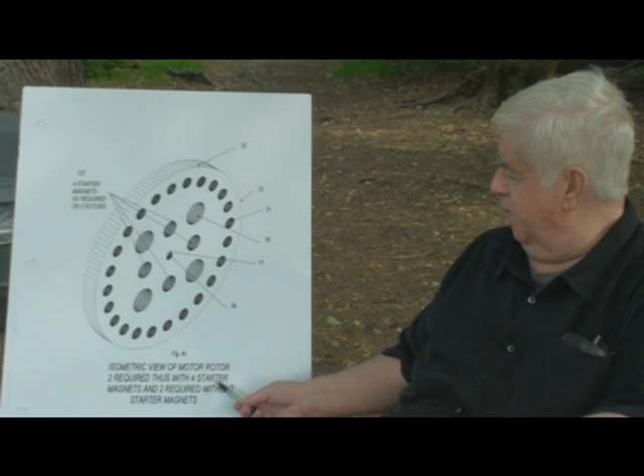What this is, as I say, is an isometric view of a motor rotor. There are 2 required with 4 starter magnets and 2 required without starter magnets. But you also have a plurality of these in any type of device. You can have 2, 4, 8, 10, whatever number and whatever size you want, and it will work.

These will be offset on either side by a stator. The stator will not rotate, it stays in its place. It will contain the electromagnets that, as these permanent magnets approach the electromagnets, will turn off. And then as the permanent magnet goes by it, in order, it will stay off for a second. The magnetic field will collapse, and then the electromagnets in the stator will reverse their polarity.

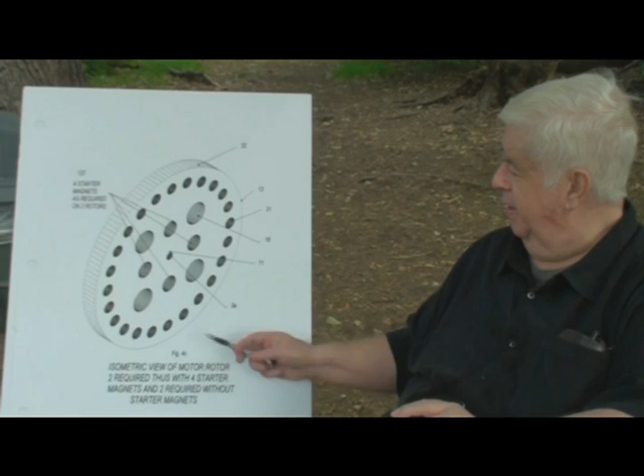Instead of pulling this permanent magnet to it, it will turn off. The magnet will coast by that point, and then when it's off top dead center of the electromagnet, the electromagnet will be switched to the opposite polarity, and it will push that permanent magnet and thus the rotor along. Each one of these will be happening in sets of 4 around it, so it'll keep going in an attractive way to pull it past the stators, and then it will turn off just before it reaches top dead center.

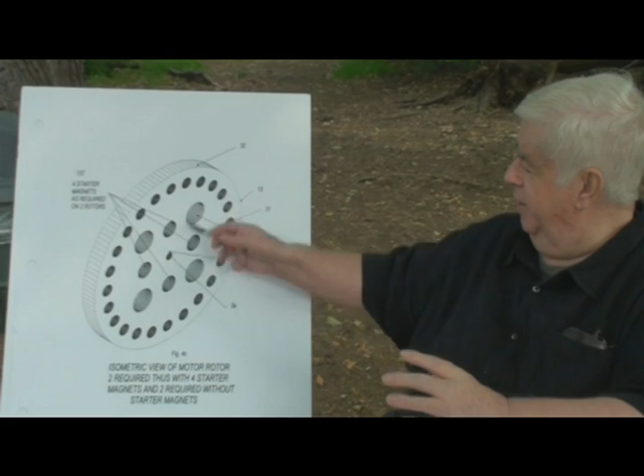Of the magnetic attractive electromagnet. Then the electromagnet will switch off, and as its magnetic field collapses, the permanent magnet in each and every one of these will go past that top dead center point, and just after it gets off the top dead center, it will be pushed by the reversal of the magnetic pole of the electromagnet in its place as it goes by. And so then the electromagnet will push that permanent magnet and the rotor around.

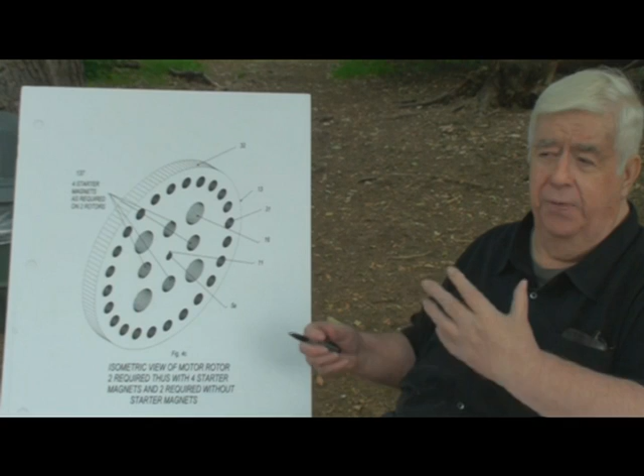And that is the basic principle of this. In other words, to put it very simply, any particular permanent magnet of whatever type of magnetic material - there are lots of supermagnetic materials, and lots of plain iron magnets that this will work nearly as well for - it can be just a matter of adapting the design of a motor generator for any particular use, by sizing it, by having different permanent magnets, whether rare earth material like neodymium iron boron that I first utilized in building such a machine, or other regular permanent magnets such as iron, cobalt, and so forth.

But in other words, the principle is very simple. As a permanent magnet mounted on a rotor comes past a stator with an electromagnet opposing it directly, as it comes near the electromagnet, this will always be north on this side, and the electromagnet will switch from south to north.

So as this particular magnet is coming up towards an electromagnet on the stator, which is right here, as opposed to this point, it will be pulled. The positive pull will be from the permanent magnet's north-seeking face and the electromagnet's south-seeking face. However, just before they touch and would lock, the electromagnet is turned off.

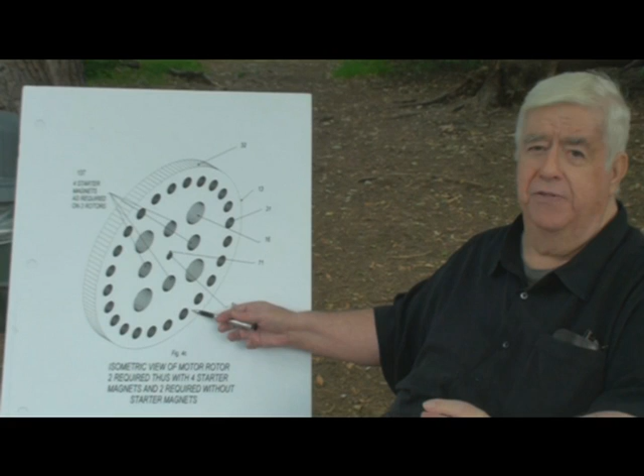And the electromagnet being turned off will still be unaffected by the permanent magnet going past it. It'll coast past it. But just as soon as it gets off top dead center, the electromagnet will be switched so that the face that was the south-seeking pole will now become a north-seeking pole, and it will powerfully repel that north-seeking face on the permanent magnet. And it's that simple.

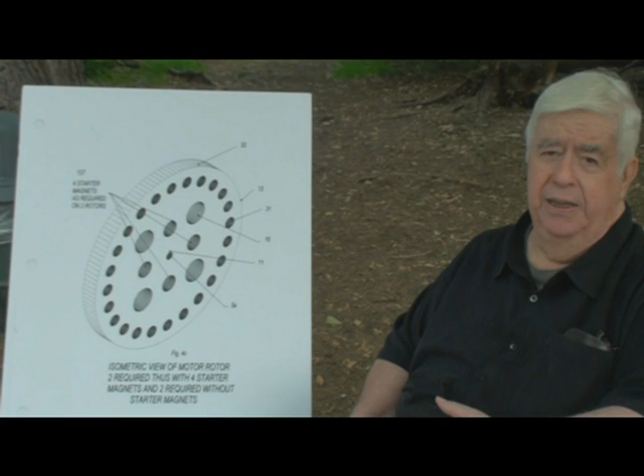These are part of a starter system. But it's very simple. Once you start it, this thing will run until it wears out, or until you turn it off. Start it with a permanent magnet, and it will then run as long as you keep it running, powered by the dark energy that uniformly fills our universe's bubble and picks up energy.

It gives 4 to 6 billion times a second from the scalar particle, as I have named it, which is the smallest particle in the universe. For that, read my Theory of Everything.

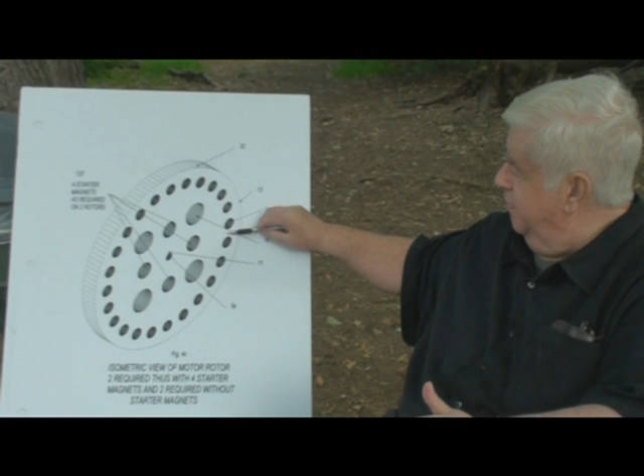But it's that simple. You pull any permanent magnet past an electromagnet, which it's facing. You have this one rotating, this one facing, and as soon as this particular magnet, or any particular magnet, gets halfway distance between the south-facing permanent magnet, electromagnets rather, the north face will come across a case where this electromagnet goes off. It will coast past, then the electromagnet will kick it.

So it'll pull it, it'll go off, it'll coast, kick it. It comes back on with opposite polarity. It's as simple as that.

And it's a principle that I had played with. I knew there was energy trapped there. I knew that magnetism was not properly explained. In fact, I have a book on one of my desks co-authored by a physics Nobel Prize laureate, and its description of permanent magnetism is an energy of a unique kind.

Well, that's descriptive by a nominative value. It gives it a name. Could have just as easily called it by one of my sister's names - permanent magnetism is Beulah. But it doesn't describe it. It doesn't explain it in a meaningful way. And what I have done is explain magnetism in a meaningful way in my Theory of Everything, which is in many places on the internet.

But the point being that I knew, as a small child, that a tiny piece of steel made into a very small paper clip could move around a very powerful permanent magnet. It wasn't the energy of the paper clip that did it - it was the energy generated by the large permanent magnet and the tiny paper clip.

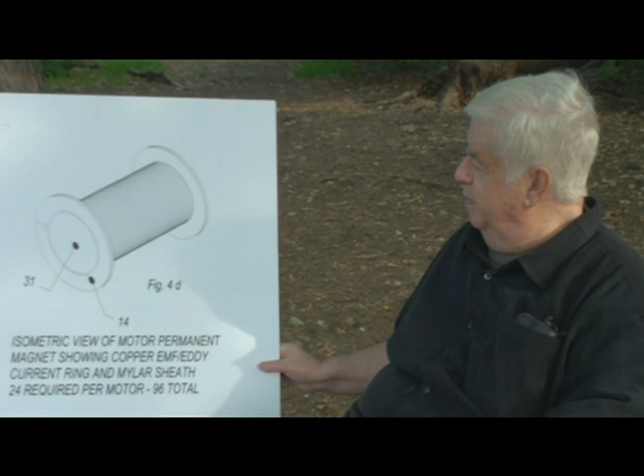And what you basically have is a permanent magnet that has a sheath around it.

First of all, it's a casing of plastic, and then it has a copper ring mounted to that with a gap. What it will do is pick up back EMF forces that detract from the strength of the magnets and the strength of the engine, and it will also pick up the eddy currents that blew up my first motor in 1982 within a split second.

So the motor demonstrated unbelievable output power versus the input power, but it blew itself apart within a split second, an incredibly tiny fraction of a second. We were never able to measure it. We didn't have the money for the equipment to measure at that time.

My partners in the venture wanted to keep all patent rights and monies within the community of 6 of us total. I tried in vain to convince them to bring in others. I even went to the point of arranging a meeting with Paul Allen and Bill Gates, and I spoke to them for a number of hours in early February 1982 about the invention and the problems in developing it for lack of cash, and asked if they were interested.

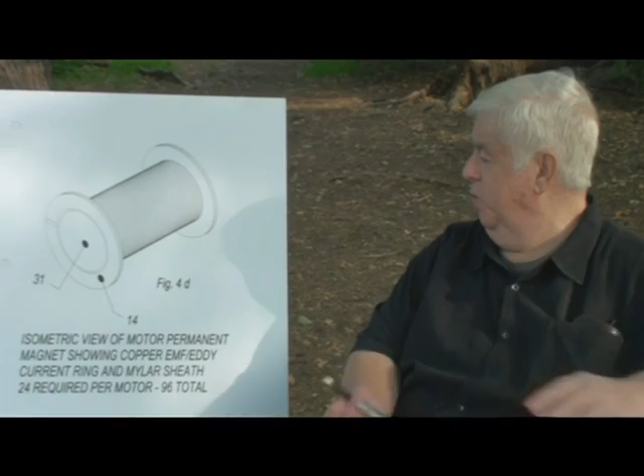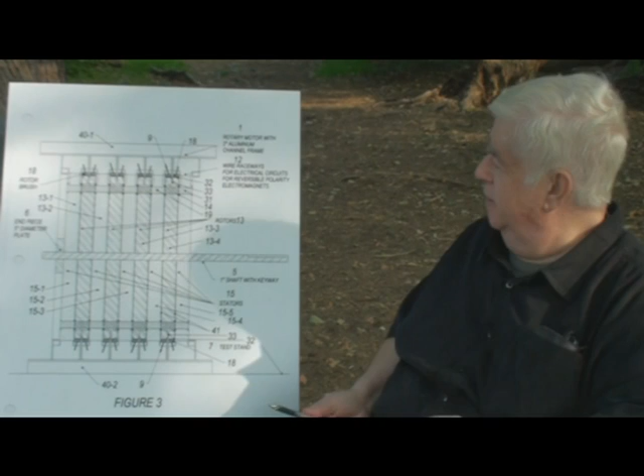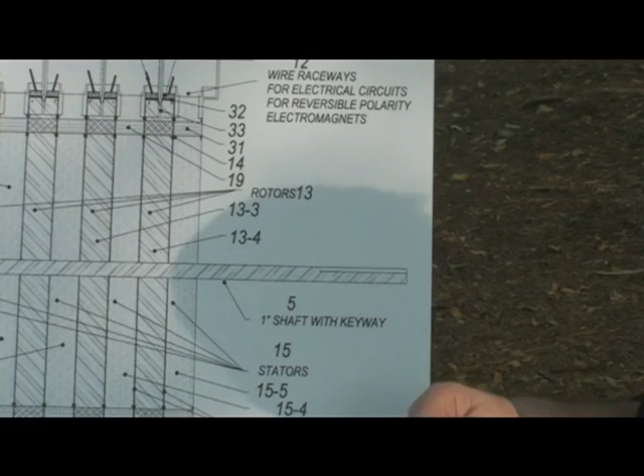I would now like to go to the next element, and that is a cross-section view of my prototype dark matter motor. It is a combination of rotors and stators. These are the rotors - there are 4 rotors, and in this configuration there are 5 stators. The stators contain the electromagnets that switch their polarity from north to south as the permanent magnetic rotors go past them.

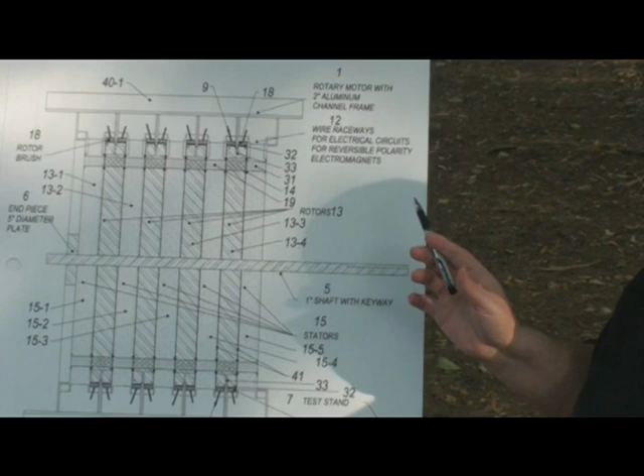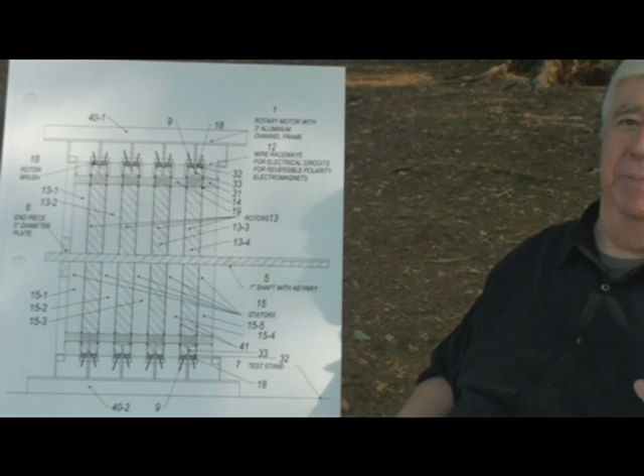Stator, stator, stator, stator, stator, with the 4 rotors in between. These are the wire raceways for the electrical circuits that pick up electric energy to keep the engine from blowing itself up and frying itself. You have a keyway here, the rotor brushes that pick up the electrical energy, and of course a shaft that picks up the mechanical energy.

The next page I'd like to go through is a close-up right here. This is figure 4A that you can see in the working drawings and specifications. And what you have here is a combination of things.

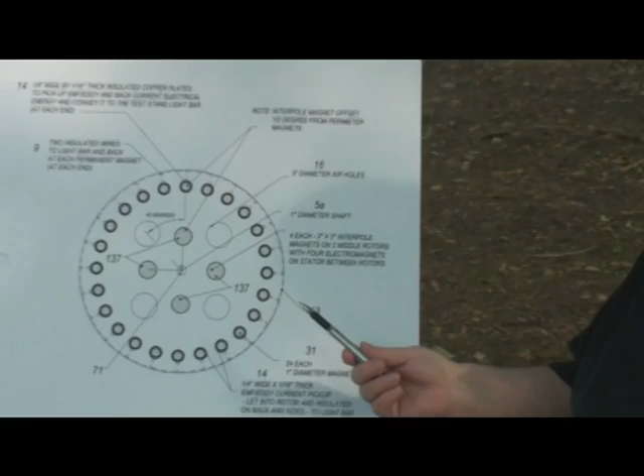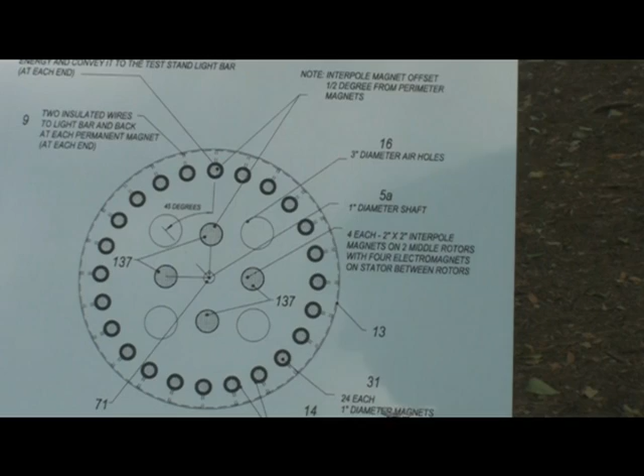You have here the 4 elements of the interpole magnets that will act as part of the stator, and around the perimeter of this is basically a drawing on a 1-inch diameter shaft of the permanent magnets mounted.

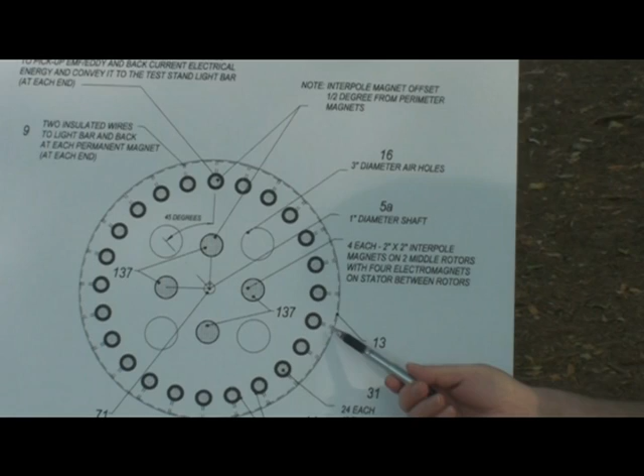And the permanent magnets also have an ability to pick up the back EMF and to pick up the eddy currents and convey them to this outer ring, as I mentioned earlier. This outer ring will then have brushes that pick off that electrical energy as it goes around the shaft.

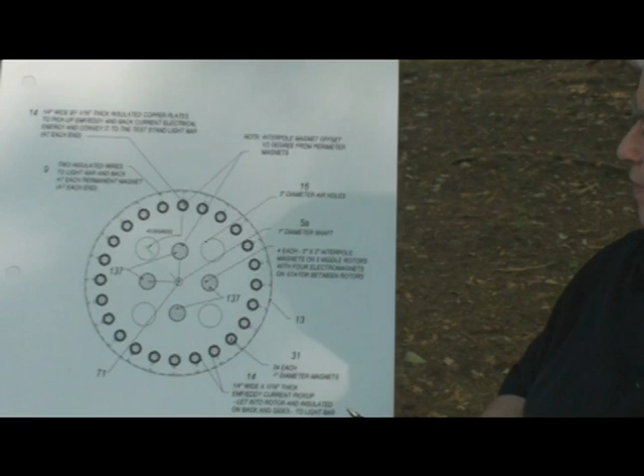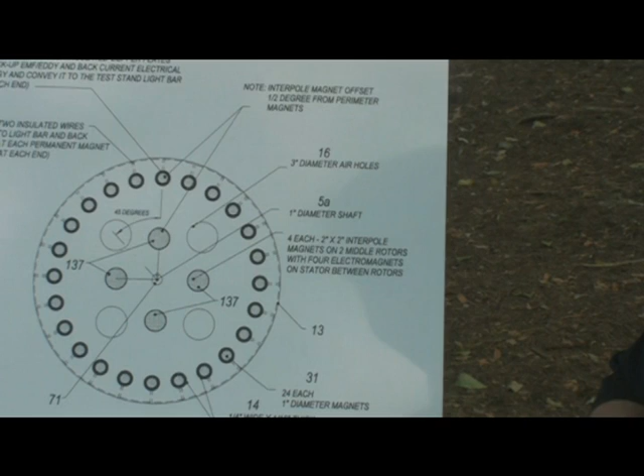But you also have here in detail this quarter-inch wide by one-sixteenth of an inch thick back EMF and eddy current pickup that lets into the rotor, insulated on back and sides, to the light bar. This light bar will be used to demonstrate with electric lights to prove there's more energy out than goes in. But there wouldn't be a light bar on an operating motor.

But each one of these is one of these permanent magnets, and it is sheathed in a sheath that picks up back electromotive forces and also picks up the eddy currents and channels them to a pickup point on the motor.

By the way, the power of back EMF was first demonstrated on July 16, 1945 at the Trinity test site with the explosion after 6 o'clock of the first atomic bomb. It was enough to put out of business electric equipment a great distance in every direction from that test site.

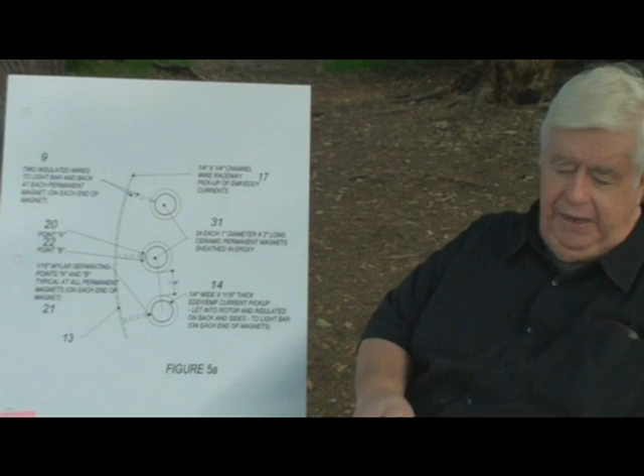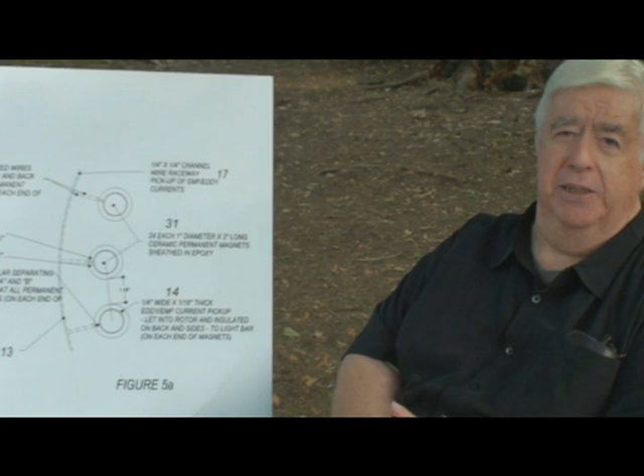And that energy is still the basis for missiles from one hostile nation to another to wipe out, by being sent into that intersection between the atmosphere and the ionosphere and being exploded with hydrogen or nuclear weapons - either atomic bombs or hydrogen bombs - wiping out the electronics of opposing nations' missiles and bombers' electronics.

It's still a valid principle, and it is the principle to protecting the nuclear states while destroying all those countries between them that we call mutually assured destruction, which wasn't to mutually assure the destruction of the Soviet Union and the United States, but to ensure the destruction of all the nations lying between those nations' flight paths for missiles and or bombers carrying nuclear weapons.

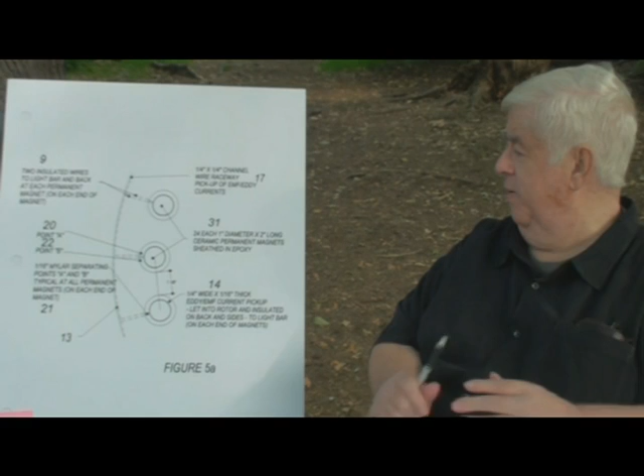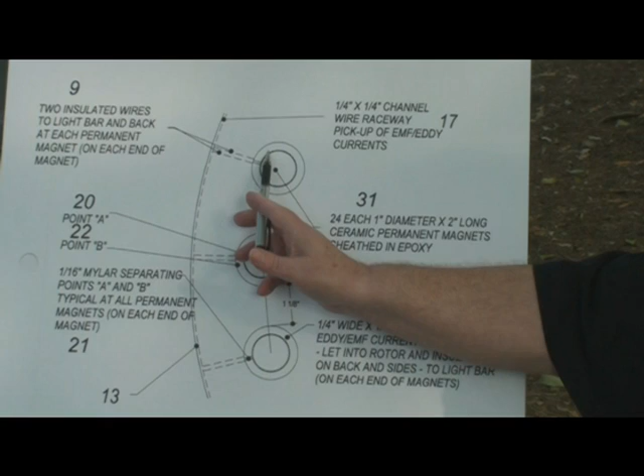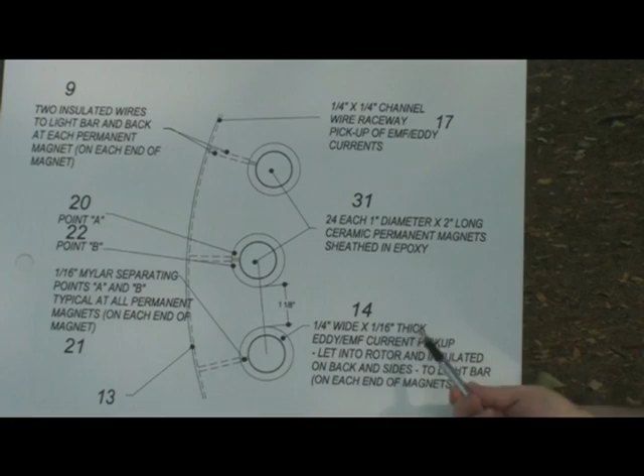The back EMF and the eddy currents are extremely important. This figure, 5A, is a further blow-up of the insulated wires that go from the sheathing of the permanent magnets to the light bar or other means to pick up the electric energy, and to the light bar rack, or light bar, and back at each permanent magnet, at each end of the magnet. These are on each end of the magnet, this assembly, and I've got it described precisely as I originally drew it.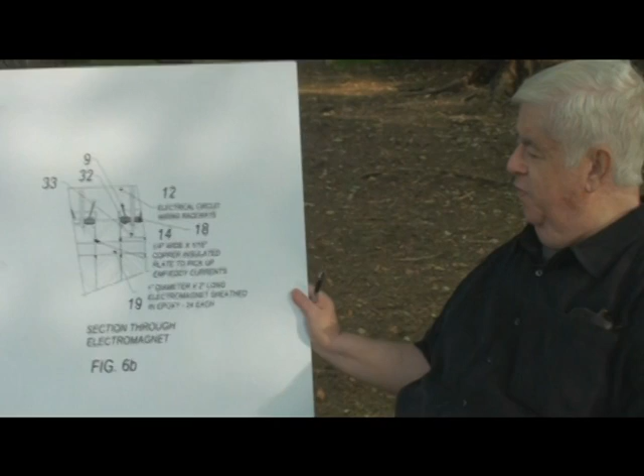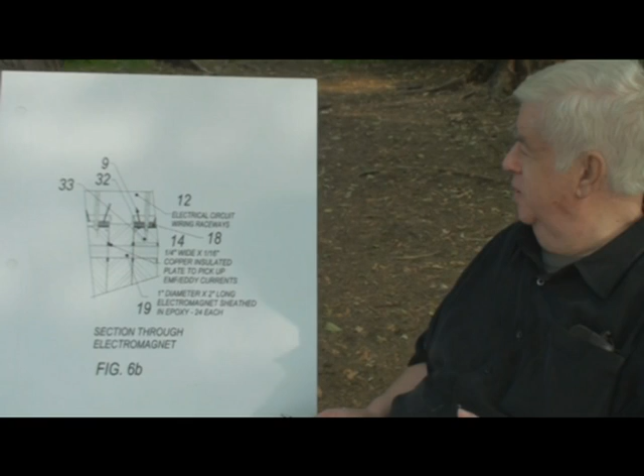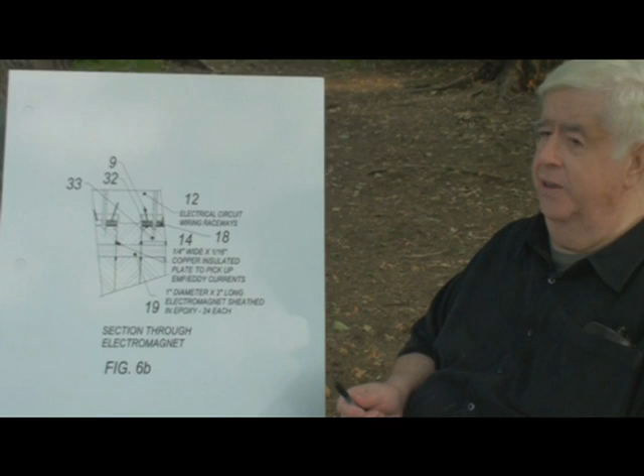Now I have to credit all these drawings, as they are in finished form in our first patent applications, to Earl Edward Smith, a very gifted architect who also developed his skill in doing drawings of this kind under the worst of circumstances, working with my more Picasso-like drawings, then getting his interpretation of my more Picasso-type drawings, and then correcting his drawings where he made mistakes, and redoing it until we got what I actually had in mind and did not have the artistic skill to better portray in the first case.

What we have here is a section through the electromagnets.

And you can see precisely that they've also got sheathing to pick up eddy currents, back EMF, etc., and so on, so as not to blow up the rig.

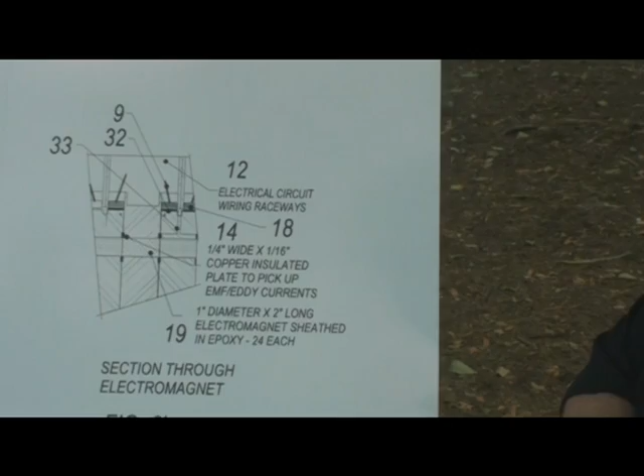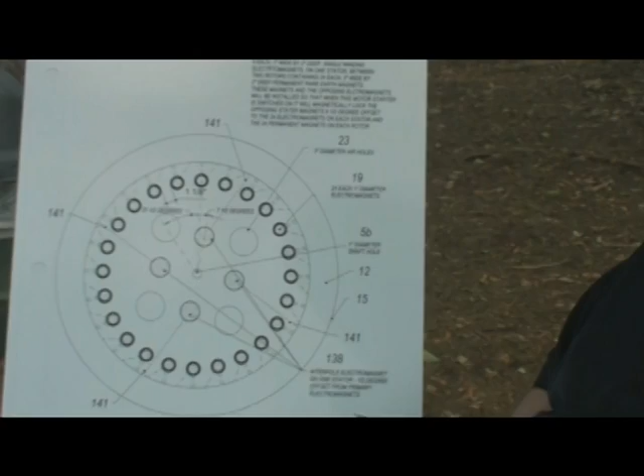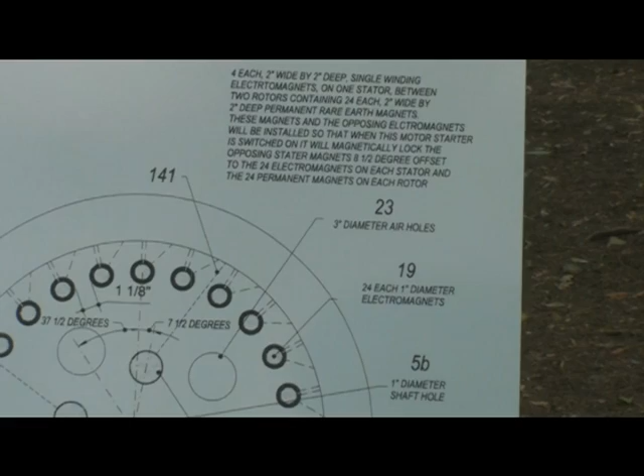This page, figure 6A, basically shows the motor starter assembly, but it also shows air holes that cool this, because you do get heat whenever you have energy being produced. And you have the shaft hole, you have the electromagnets for the motor starter, and these are

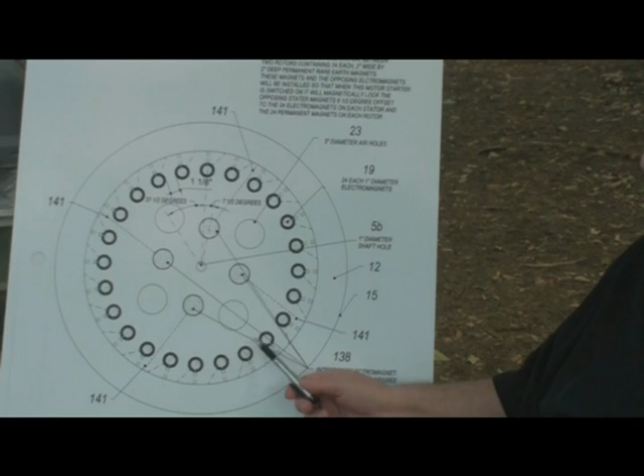the electromagnets counterposing the permanent magnets that are in the rotors. So these are the electromagnets that attract, turn off, repel, attract, turn off, repel the permanent magnets mounted on the rotors.

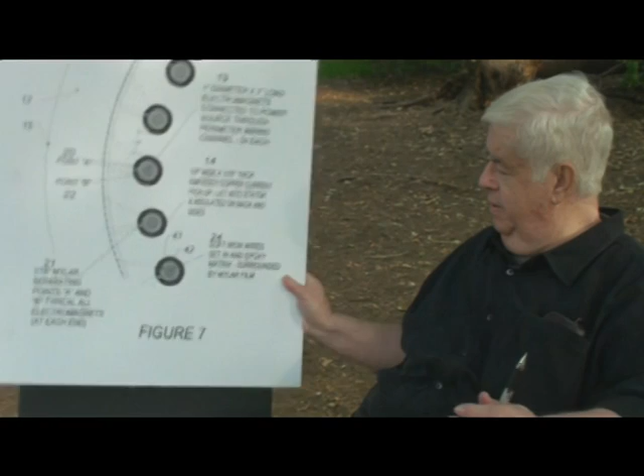To me, it's very, very simple, but then I've been working on this design since 1969, and so that's a little quicker.

What I have here is a blow-up of the electromagnets and how they're wired. And it's a very, very simple thing. The whole thing is a very, very simple thing. It's just that it defies accepted physics and electrical engineering.

I have an article that'll be back up on the net that I wrote years ago called What Michael Faraday Failed to Find. In 1831, when he found and developed the principles that created electric motors that he invented, and he invented the electric motor, he invented not only that, but he invented the electric generator, which is basically an electric motor run backwards, and he also invented systems of transformers and other appurtenances to electric motor and electric motor assembly and electric generator assembly and use in its time. And when he did that work,